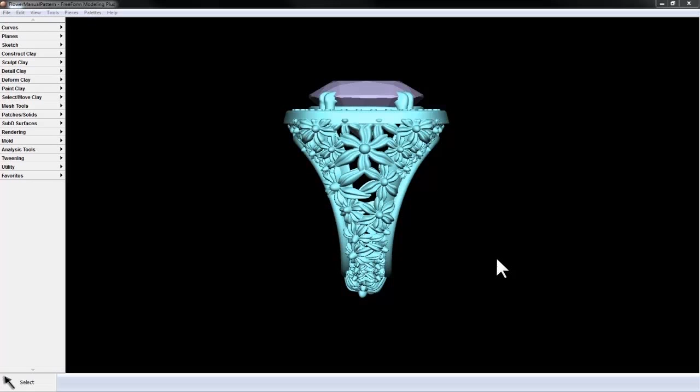In this video, we're going to take a look at the new tool, Manual Pattern Piece, for Geomagic Freeform 2013. In this example, I'm going to use the Manual Pattern Piece tool to create a flower motif on the outside of a ring. First, I'm going to show you how to manually pattern one piece, and then we'll proceed to using multiple pieces to create a pattern.

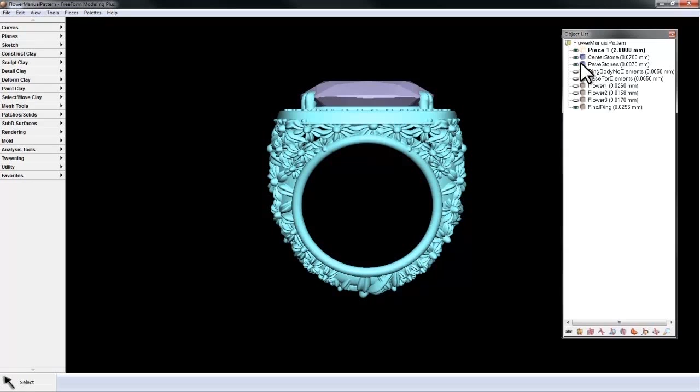On my object list, I've prepared the ring body with no elements, and the base that I'm going to use to lay the elements upon, so I'll show both of those. They're sharing surfaces. And to begin with, I'll use this flower piece.

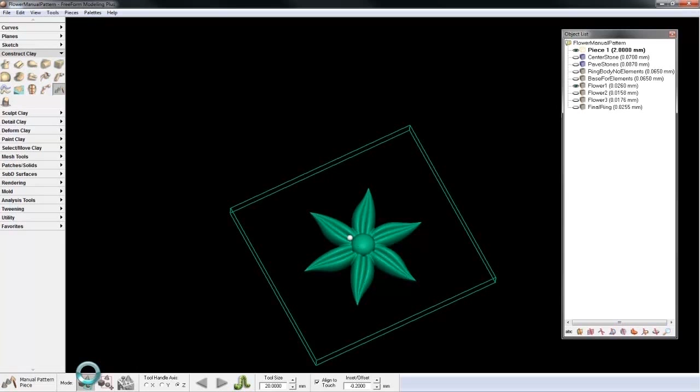The Manual Pattern Piece tool is found in Construct Clay, just next to Pattern Piece, Manual Pattern Piece. So I'm going to activate the icon and bring up the dynabar. Now the first option is to select one tool piece. So to do so, I click on the flower that I want to pattern with. And now you see I get my sculpting tool with the flower attached to the end of it.

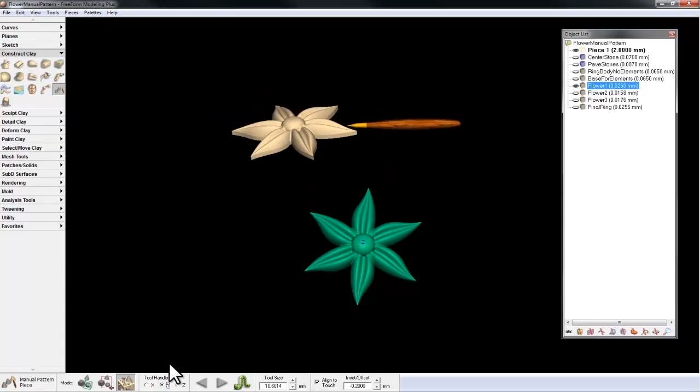Now I have tool handle axis. I can choose X, like so, Y, like so, which in this case is very similar, or Z, which is the way I'm going to use it, where it's on the tip of the stylus.

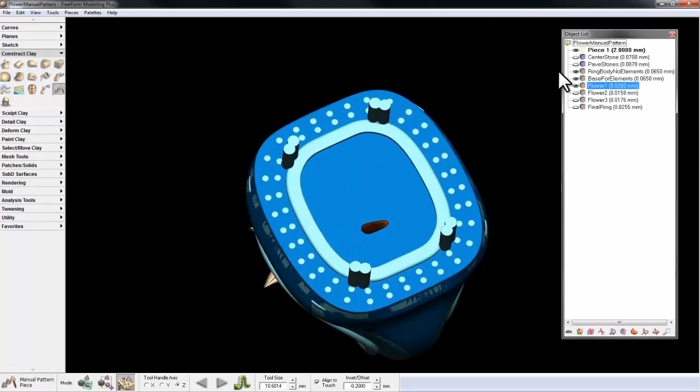Now I'm going to bring back the ring body with no elements and bring back the base for the elements. And I'm going to activate the base for the elements. So now using the plus and minus keys, I can control the size, and if I look, the tool size is also shown here. Change it to 5mm.

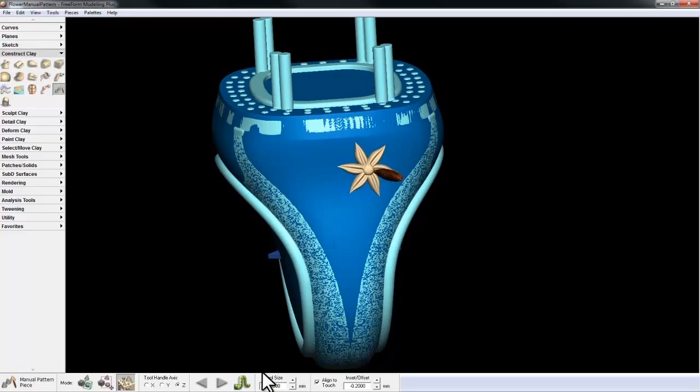And now, just like in the add clay function, I can use my stylus to position the piece normal to the surface that it's on. So I'll lay down a few. Now you see I'm getting some overlap.

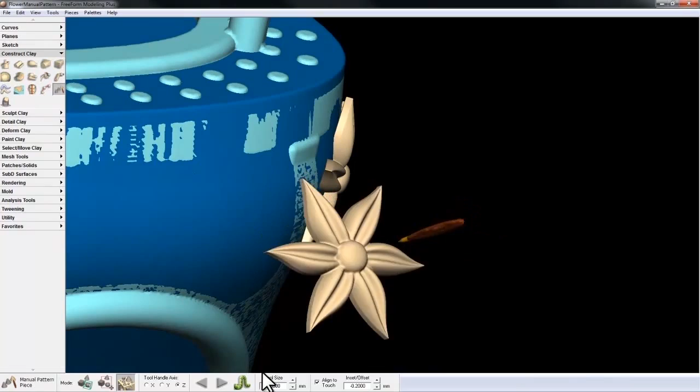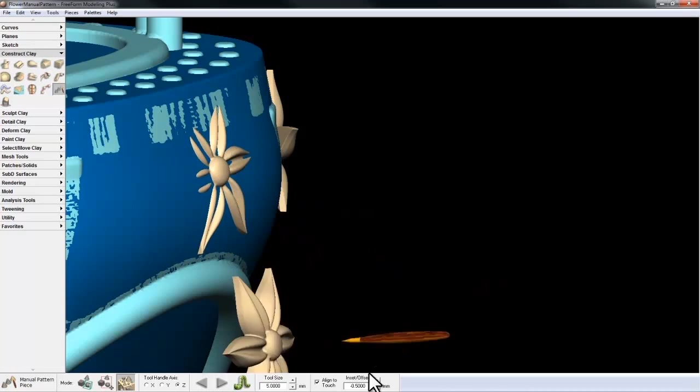This is dictated by the inset offset. So depending on the size of the piece, like for a 5mm piece, maybe I'll go in 0.5mm. Now when I place it onto the surface, it'll indent 0.5mm. And again, if I was to change it to a positive, say 5mm, when I place it on the surface, it'll actually appear 5mm off of that surface.

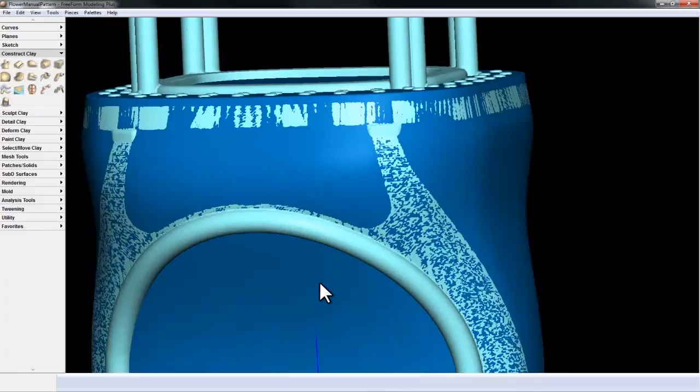But the really exciting and dynamic way to use this tool is to hold the Shift key as you're pushing into the surface, and you can actually manually adjust the depth by controlling it on the haptic device, and then hitting the button again to place the piece. This gives you the ability to dynamically lay out your pieces without having to go down to the dynabar for every operation.

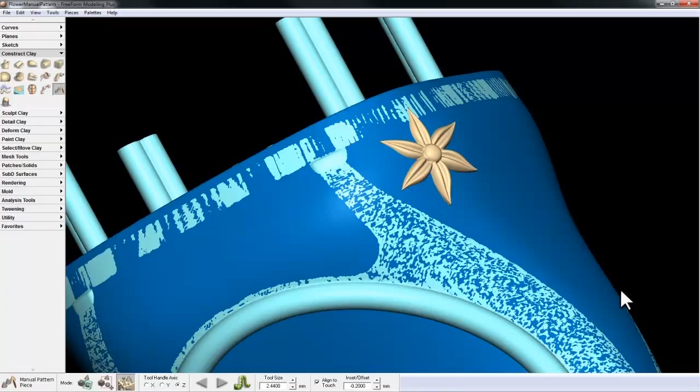So I'll set the inset at -0.25, and I'll just start laying out flowers across the base element. Just lining them up like so. I can use the plus and minus keys to change the size.

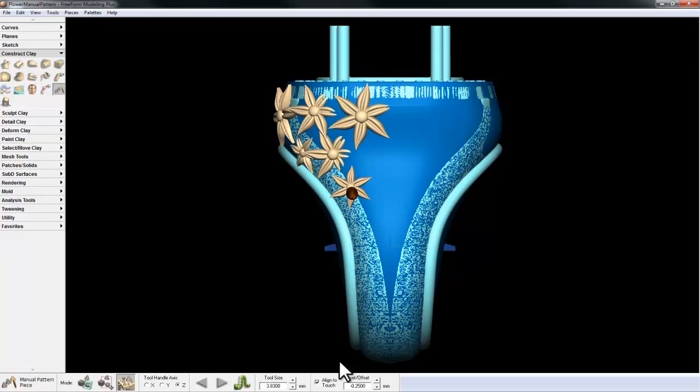Now if I open up my object list, you'll see that a new folder has been created, and that each of the manual pattern pieces is its own piece in the object list.

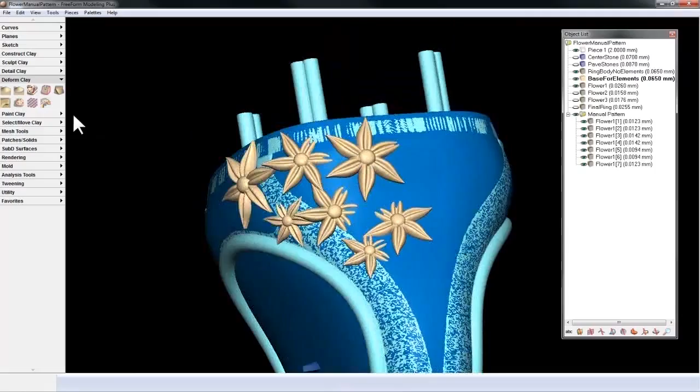So of course, now that I have these laid out, I could go into deform clay and tug, and activate the given piece, and start to sculpt it into position.

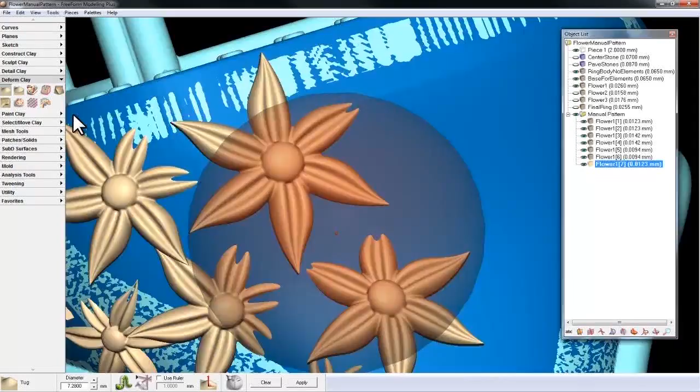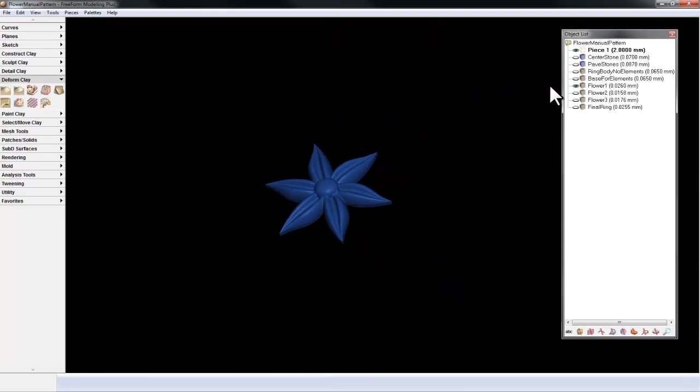Okay, so that's how we use one piece. Now I'm going to delete the work I just did. And hide the base and ring for a moment. And you'll see I have flower 1, flower 2, and flower 3 prepared. If I show all of those flowers, and I go back to manual pattern piece, and...

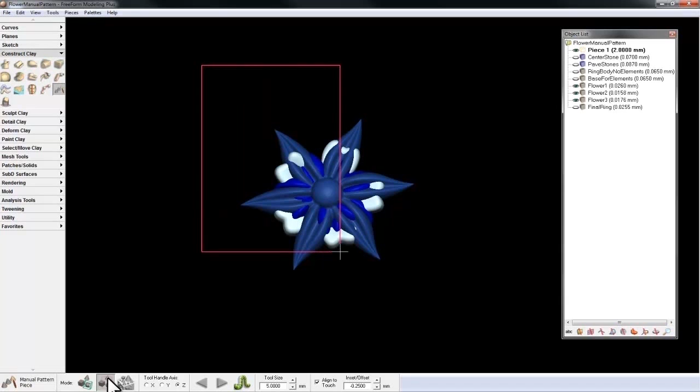then go down to the Dynabar and choose select multiple tool pieces, I can then use a marquee select to choose all 3 pieces at once, and it automatically jumps me forward to create pattern.

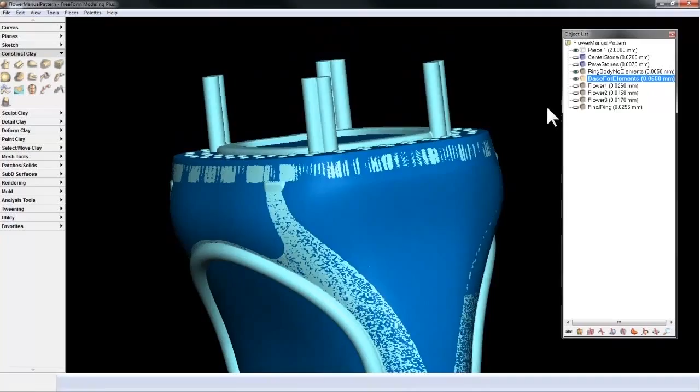So now I'll bring back the base for elements in the ring body, activating the base, and all my presets are the same, but this time, after I lay down one piece, I can go to these arrows, next tool piece, and it automatically loads the other flower pattern from the library. And again, the third comes up, like so.

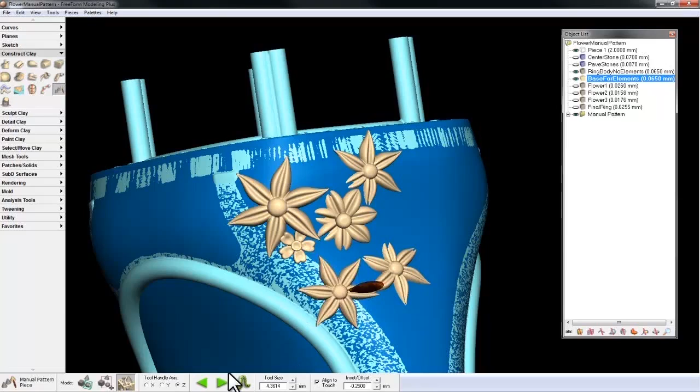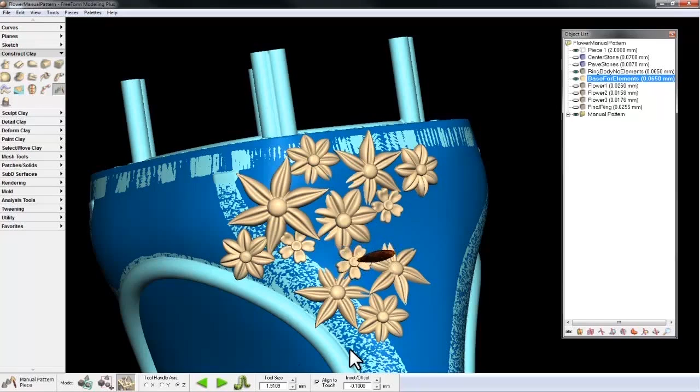And as I make the tool smaller, I can change the inset. Like so. And I can quickly build up this very complex pattern. And if I hide the base for the elements on my object list, you get a clear picture of the pattern that we're laying out over its surface.

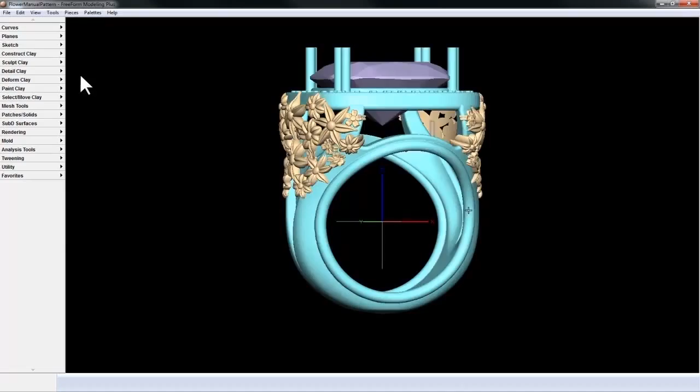And it gives you a sense of the type of details that you can create using the new Manual Pattern Piece tool in Geomagic's Freeform 2013.